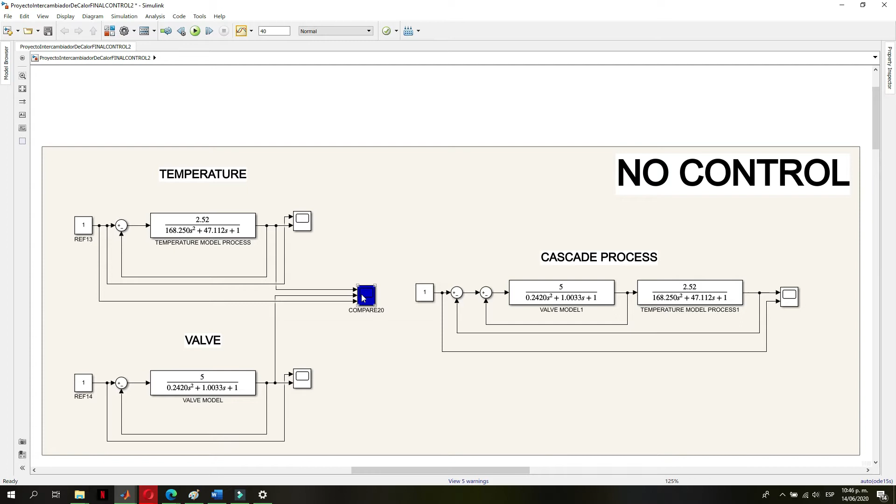Okay, now, first step, the characterization of the chosen plant is obtained. In this case, it is taken from the cascade control report for a heat exchanger. Then, each of the models with feedback is simulated in MATLAB to observe the response to a step, and the simulation of the cascade process is also carried out. It is observed that for all three cases, the system stabilizes. However, it does not stabilize at the indicated reference equal to one. This is because there is no control over the plant.

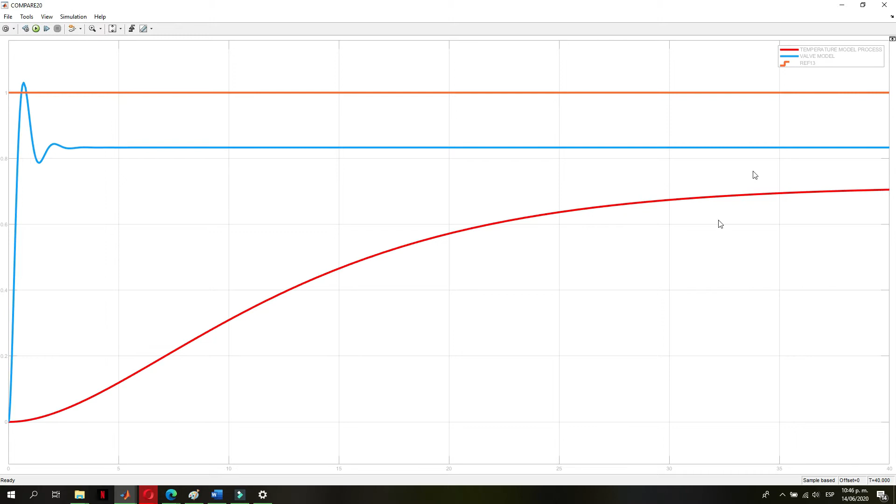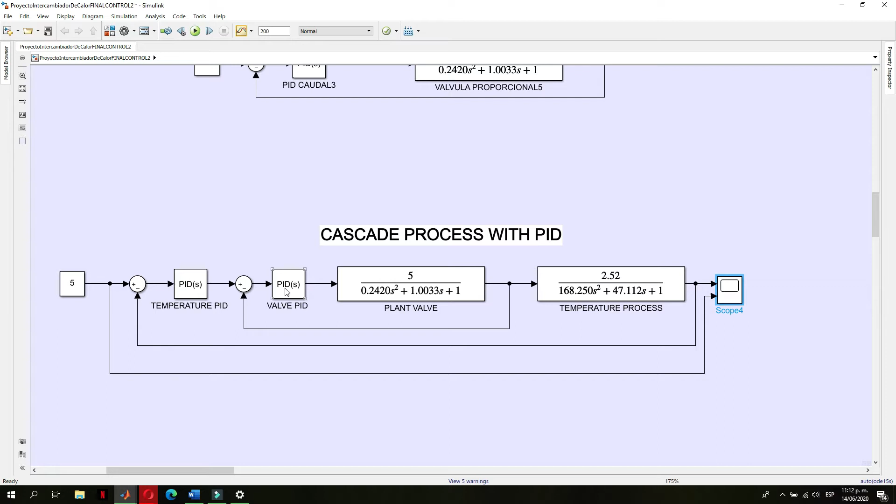Next, for this cascade process, it is decided to make a PID controller. It is observed that the response obtained from the cascade process with two PID controls is this. In this answer, it is observed that the system stabilizes at the reference value. Also, the system has a maximum peak of 3% and a stabilization time of 116 seconds approximately. Stabilization time can improve as well as maximum peak.

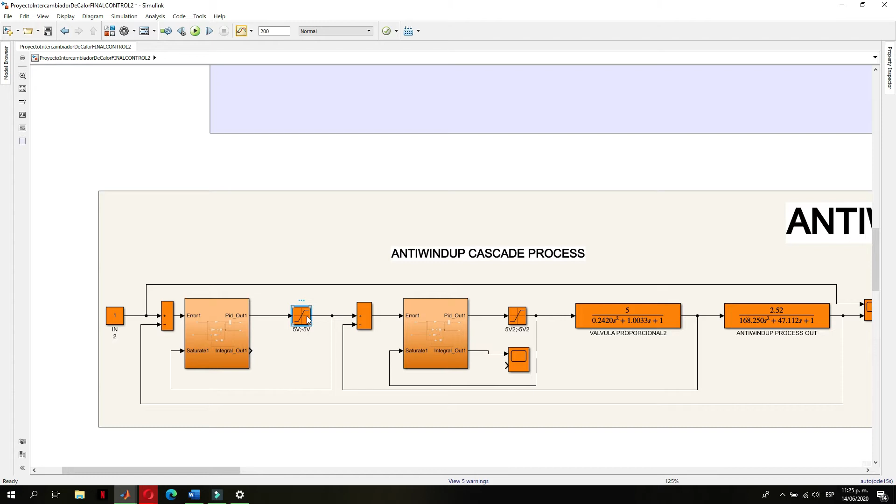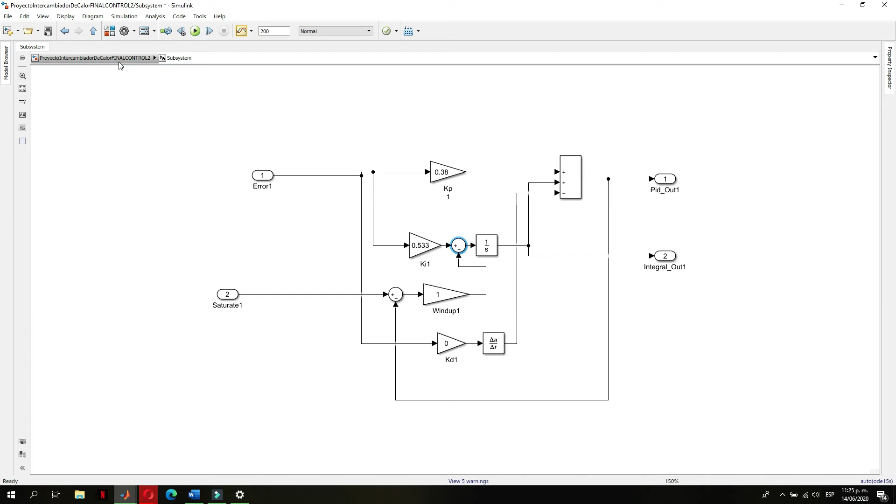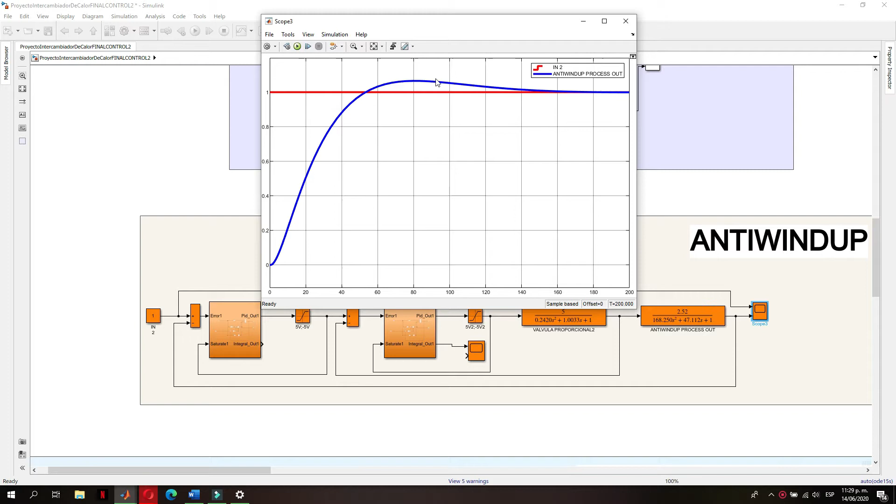Now, to be able to make the plant work with real conditions, a saturator is added. It simulates the real working range of the plant. A strategy used to prevent the plant from becoming unstable is to use a method called anti-windup. That consists of adding an anti-windup gain that will allow me to regulate the effect of the saturator, placing this before the integrator. The response obtained is equal to PID, although in this case real-world conditions are added to the plant.

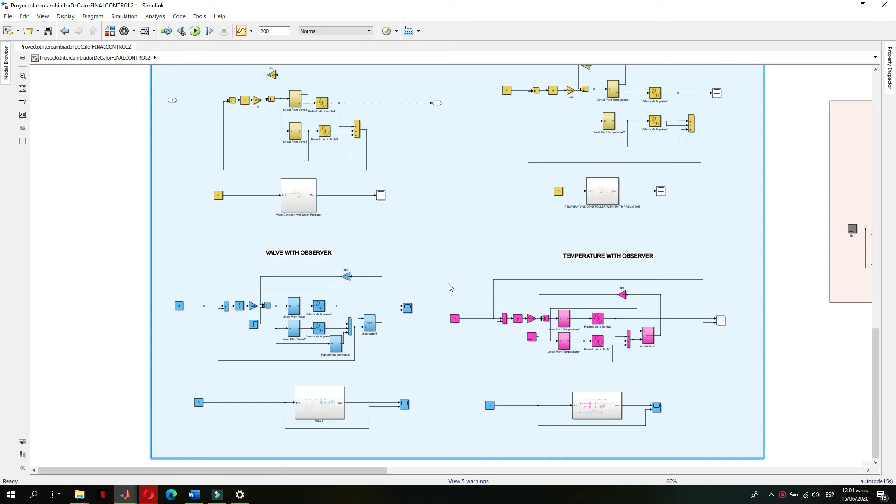For the Smith predictor design, first I extract the dynamic system of the cascade process from an exchange paper, where this system is represented by two transfer functions. One is the valve behavior and the other is the temperature process behavior, from the cascade process of the heat tank. After designing the predictor simulation in MATLAB, I make the code where I will get the control values.

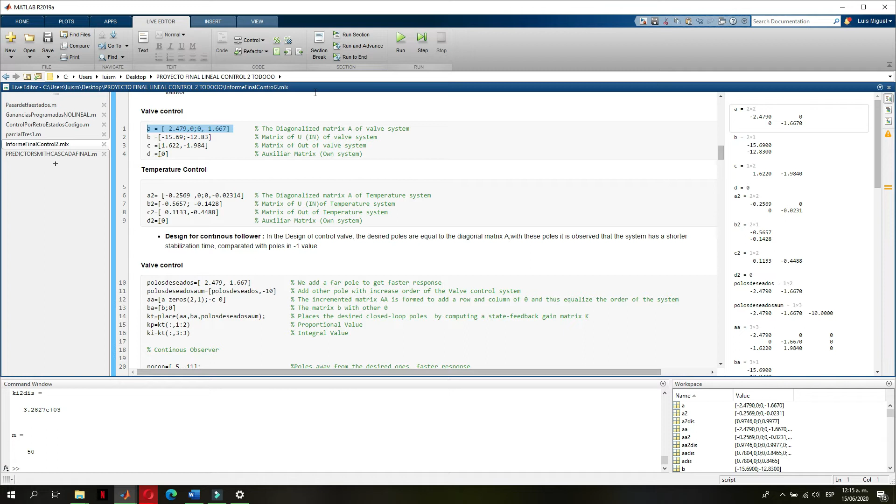Now, the next step is to convert the transfer function into state variables. For the valve model, this is diagonalized to extract the matrix A. The matrix B is the input matrix, and the matrix C is the output matrix. Also, I repeat the same process for the temperature model. As assumed, the poles of the system are also obtained from the diagonalized system. In the design of the control valve, the desired poles are equal to the diagonal matrix A. With these poles, it is observed that the system has a shorter stabilization time, compared with poles at -1.

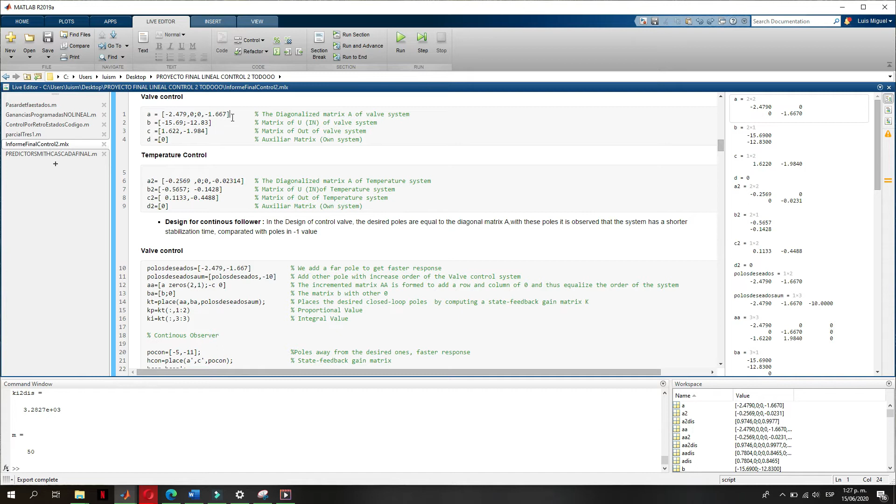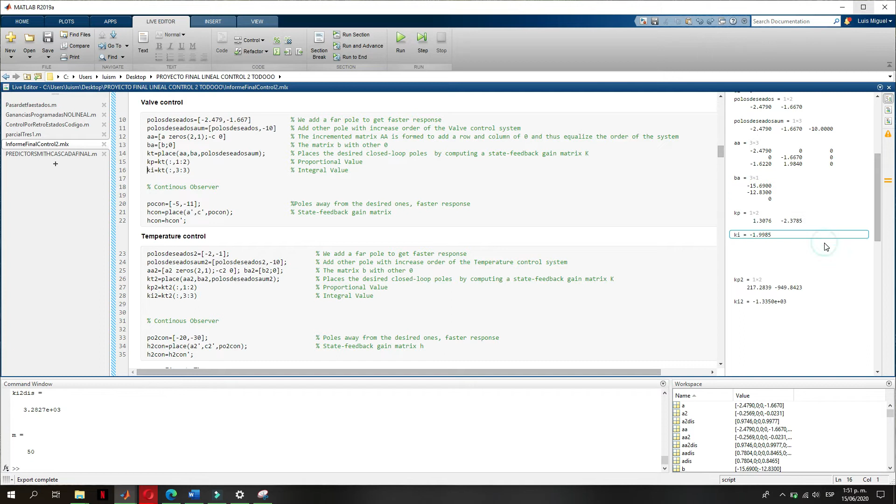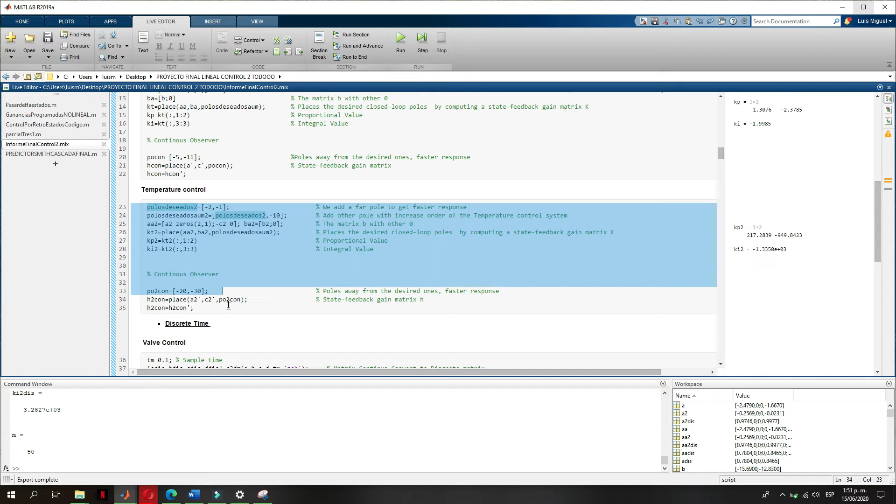We continue with the design of the continuous observer follower, using the desired poles, adding one more to increase the order of the system, with equal size to the augmented matrix A and augmented matrix B. Finally, the proportional and integral values of our model. The same process is used for the design of the observer follower for the temperature plant.

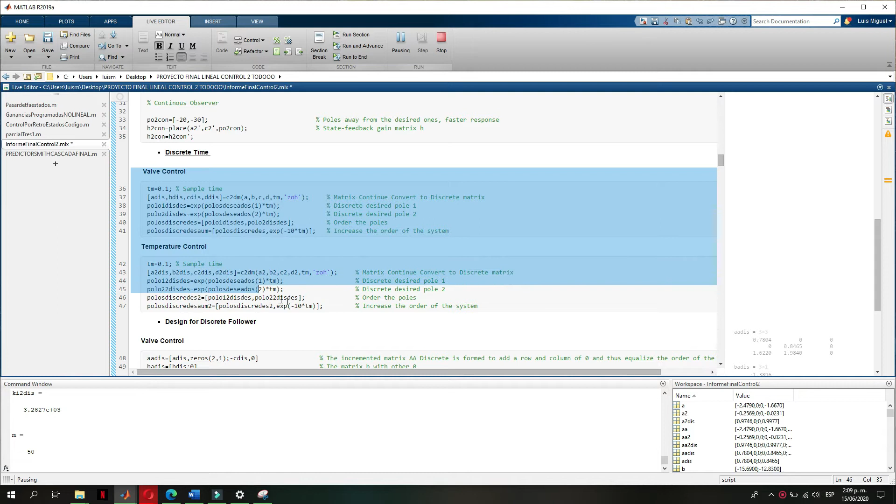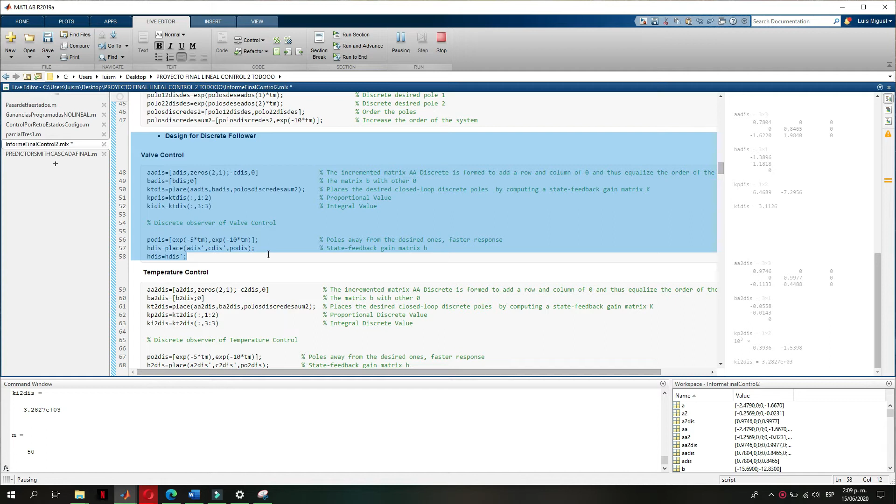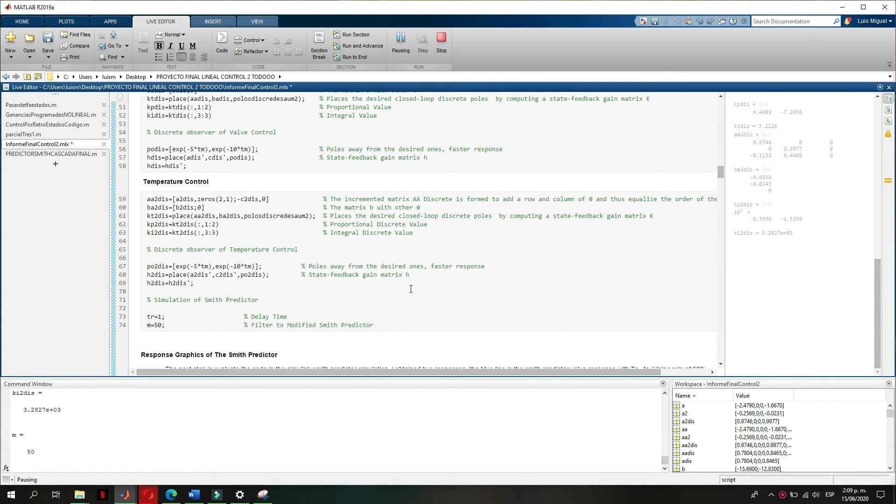Now everything becomes discrete time. A sample time is added and the previously used matrices and desired poles are converted to discrete time. This will help you to design the follower with the observer in discrete time for the two process models and thus be able to mount software that will control the applied process. These last two parameters correspond to the delay time and filter value of the Smith predictor. The next step is evaluating the code in Simulink.

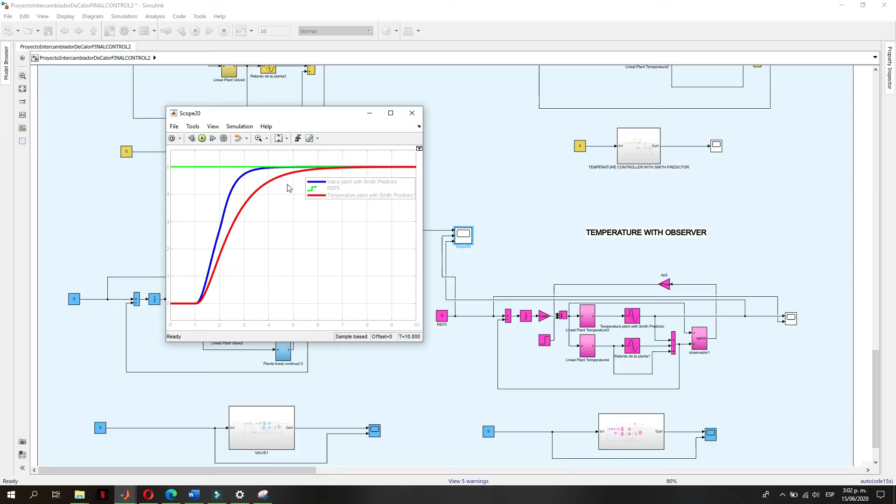I obtained two responses. The blue line is the Smith predictor valve response with stabilization time equal to 4 seconds, using the rule of 98% stabilization value. Also, with poles equal to matrix A. The red line is the Smith predictor temperature response with stabilization time 7 seconds, using the rule of 98% stabilization value. In this case, poles are modified because the poles located in the matrix A now have a fast response.

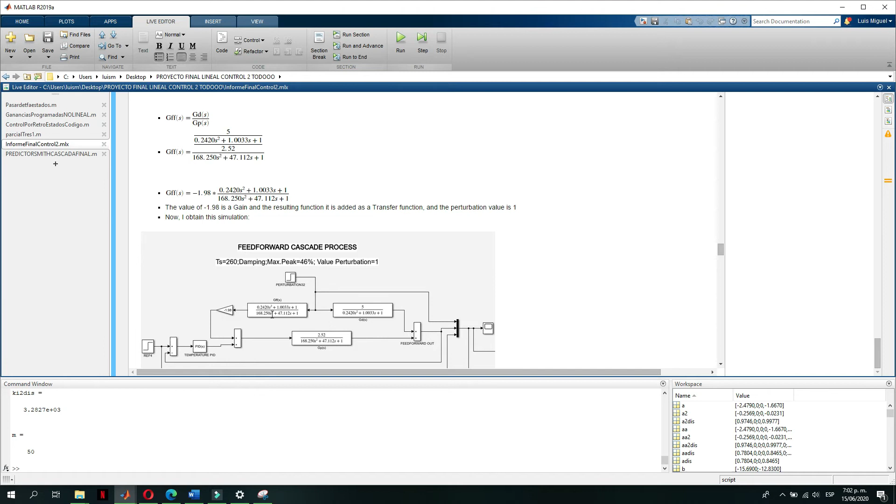Next, to continue improving the proposed control, the design of a feed-forward or anticipatory control will be carried out, which allows eliminating the disturbance that may occur in the cascade process. This control uses the resulting function GFF from the combination of the valve model and the temperature process model. This is the result of this operation. The value of -1.98 is a gain, a transfer function is added to the resulting function, and the perturbation value is 1.

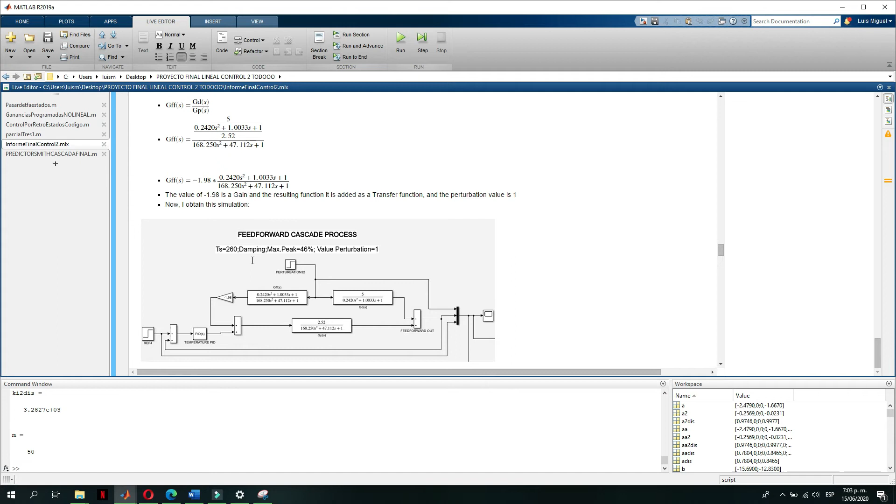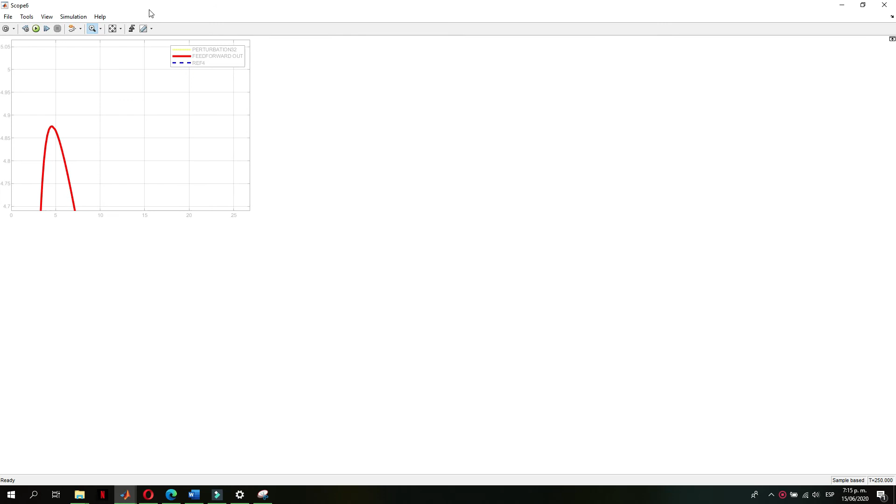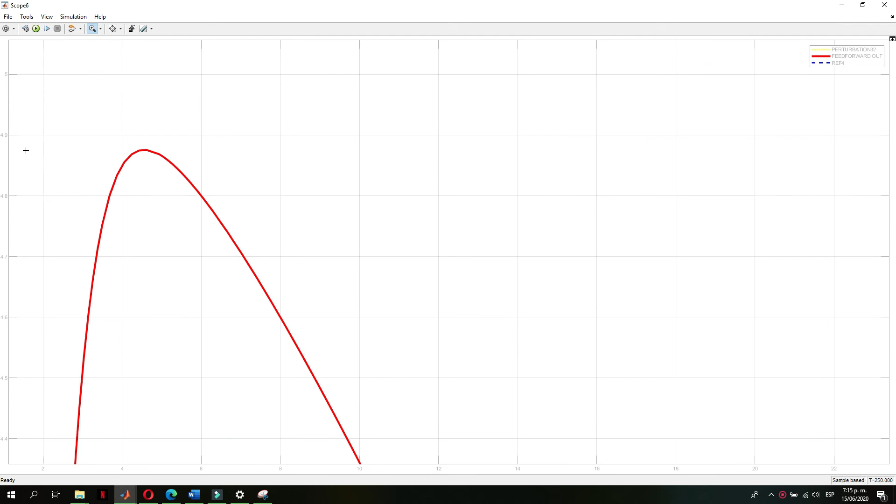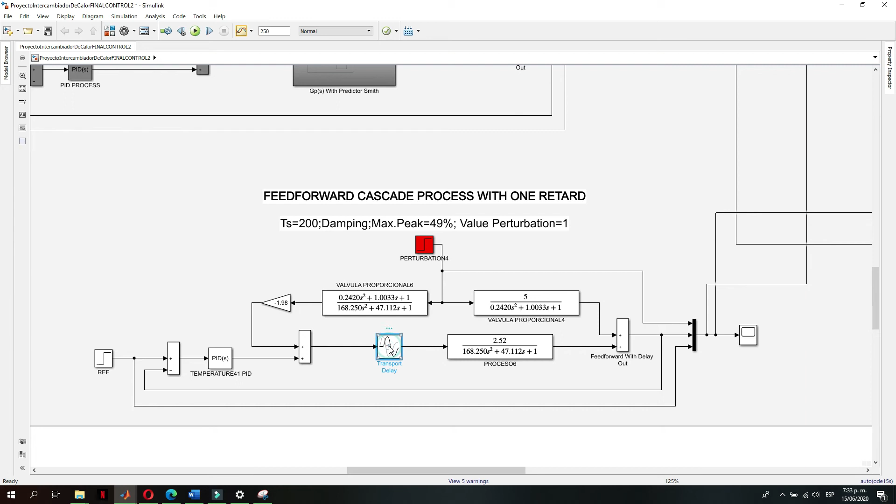Now I obtain the simulation. The result of the simulation for the process in cascade is in this graphic. I observe the stabilization time is 260 and the maximum peak is 46%, and the perturbation value is 1. Next, I added a delay of 1 to the process and compare these results.

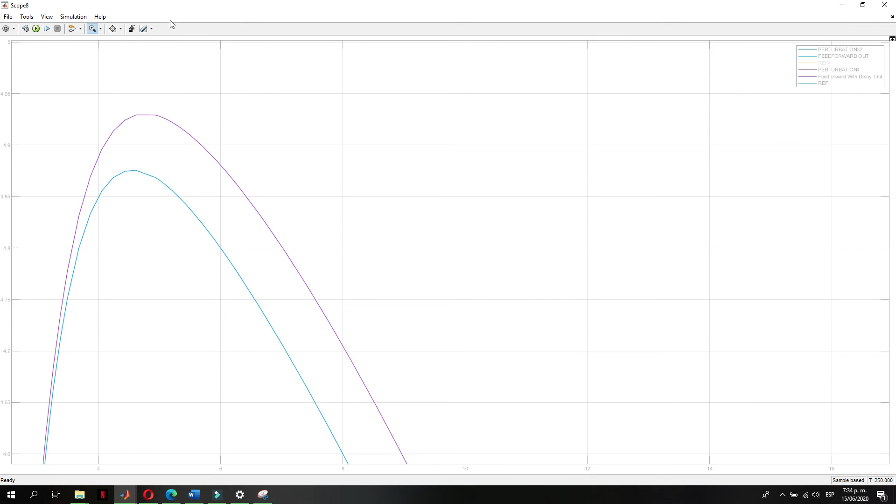In this graphic, the blue line is the feed-forward control without delay. This has a stabilization time of 260 and the maximum peak is 46. While the purple line is the feed-forward control with delay, which has a stabilization time of 200 and the maximum peak is 49. It can be seen that although the delay increases the maximum peak, it minimizes the stabilization time.

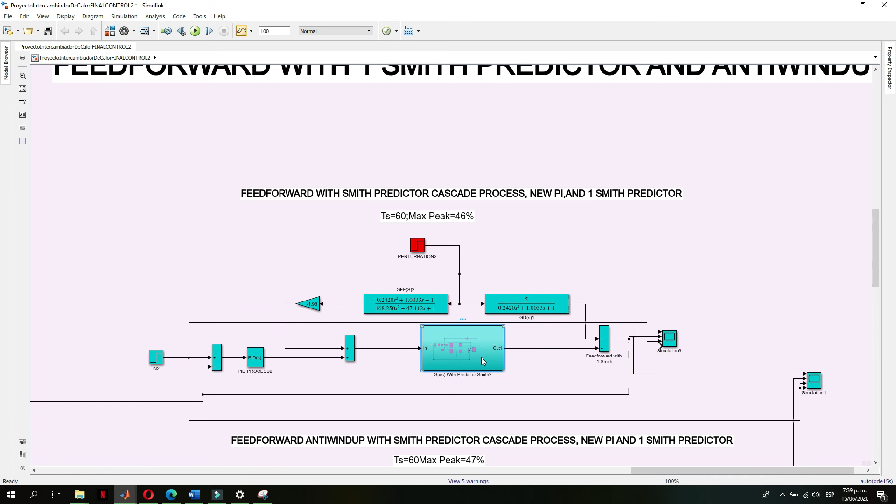Now, I add new PID values. These values optimize the response more than the previous ones. And I add a Smith predictor for the temperature process. The results are compared with the other simulation. In the simulation, I add the anti-windup. And the response is almost the same, with the difference that you can insert the real working range, modifying the saturation value.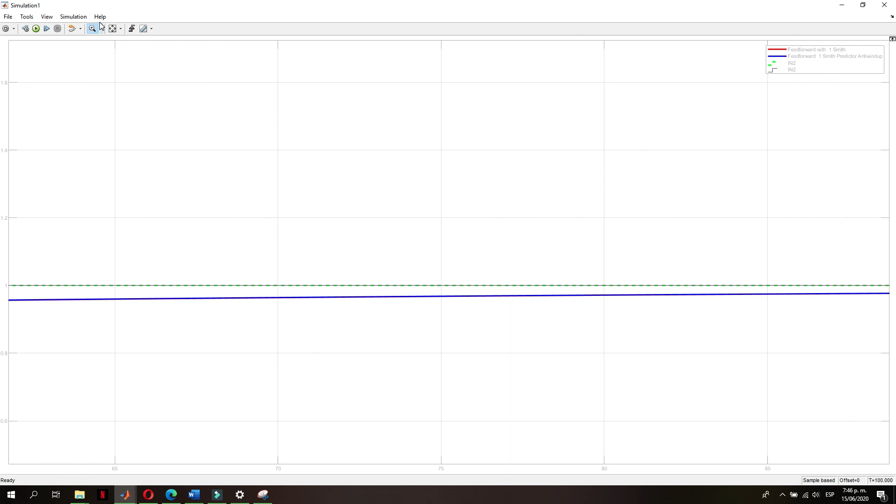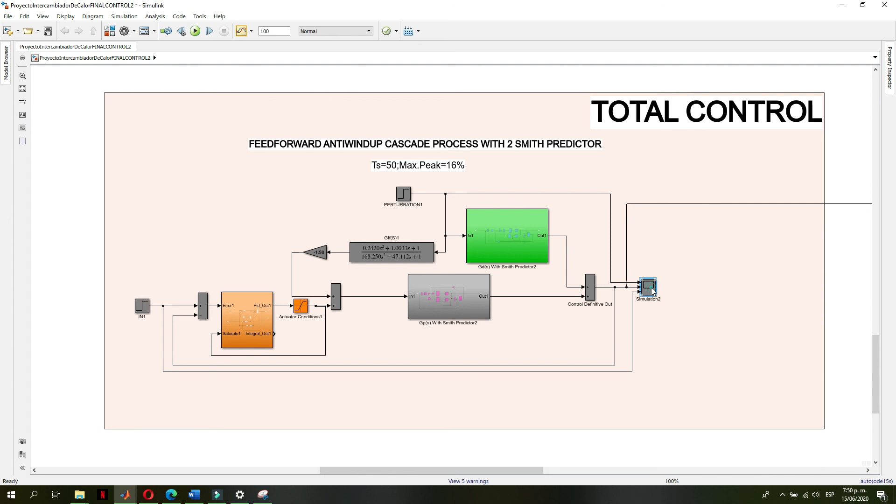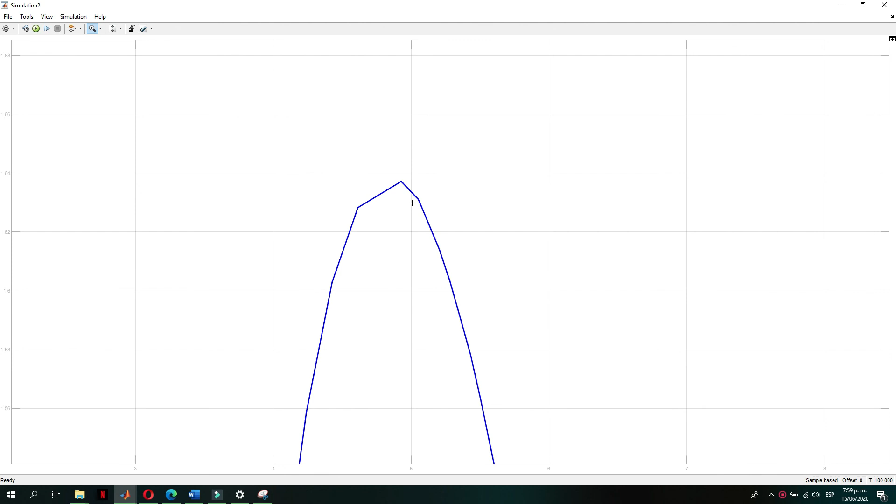In addition, it is observed that the stabilization time improved considerably. It is now 80. And the maximum peak decreased a little. It is now 46%. Okay, for the ultimate and definitive simulation, I have decided to add the delay to valve 2 and the anti-windup. My ultimate design is this. Okay, in this graphic, the stabilization time is 50 approximately, and the maximum peak is 16%.

Finally, I will compare the control designs previously made in order to observe the best response. In conclusion, they are all controlled since they stabilize at a value. However, the best response obtained was the one that contains the complete process in cascade with its respective Smith predictor, anti-windup for real range, and disturbance control.